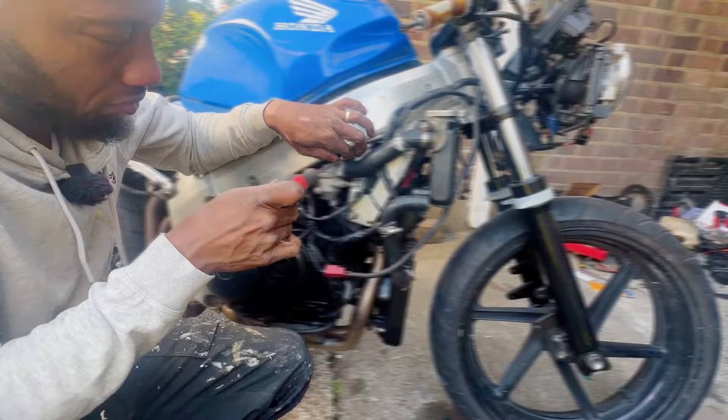I am back on the SV650S, the Suzuki, and today I'm going to attempt to get these carbs synchronized and get this bike running the way it should be. So in the last video we managed to get the carbs cleaned up, got the carbs back on, and we got the bike running, not running how I'd like it to, but running anyway.

So there's a couple of things I need to check first before we can try and get into the sync. There's also something that I've noticed after going through the service manuals that would have been contributing to the rough running. So I'm going to show you guys that now, and then we're going to try and see if we can get this thing synced up.

All right guys, so here is the bike. So it is running. I've had it running for like 2 minutes, but I'm going to have to get it running for probably about 10 minutes or so just to get the engine warmed up to temperature before we do the synchronization. But before we do that, I'm just going to run through a couple of things for anybody who wants to do this, things to look out for to get this thing done right.

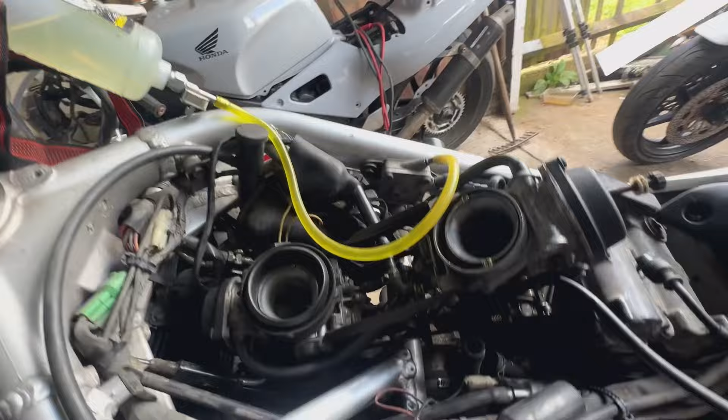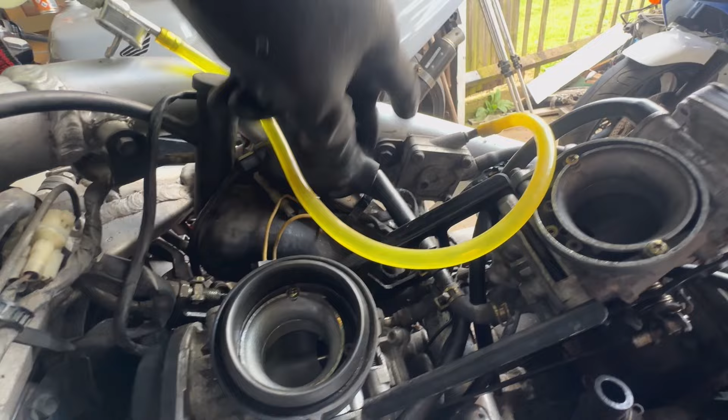So one of the first things I realized when I was going through the service manuals and the connections for the fuel system, obviously I didn't get a tank with this, so I wasn't sure where all the wires go. So we've got a fuel pump on this bike, which is here. We have the fuel fed into the fuel pump, and then it pumps the fuel out on this one here, and that goes down into here and then gets split to that carb on the back and then down to this carb on the front.

Okay, so there's a Y connection here. So into the fuel pump, out of the fuel pump. There's also a diaphragm in here which opens and closes, it's like a diaphragm that opens as a vacuum. Basically a vacuum sucks air out through this hose into the engine here. So this hose basically is the vacuum, I'm trying to get the right word.

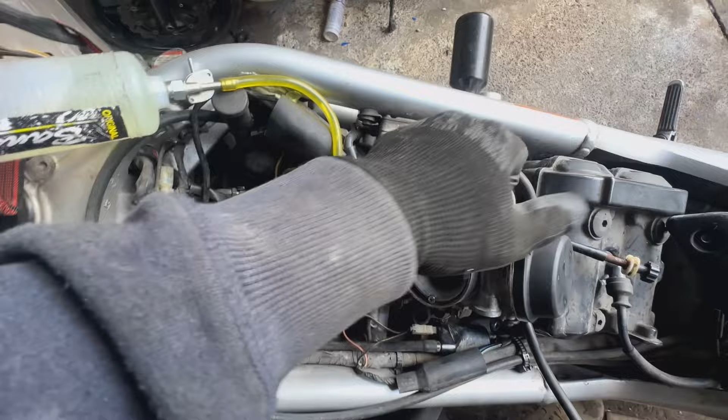Basically there's a vacuum that's created in the engine while the engine's running, and it'll open this diaphragm to let fuel out. So at the moment with the bike off, no fuel will be going down to the carburetors. Okay, so you need to have a negative pressure connected to here. So we can leave this here for our test purposes, so it already has its negative pressure, but the carburetor also has, because this is something that's slightly different than the VFR.

On the VFR, this hose is the way you would put your carburetor sync tool on, but on this bike you actually have a vacuum connection on the carburetor itself, which is this hose. Now this hose provides vacuum to the actual gas tank, which has another diaphragm on it. So as it is at the moment, this being open when I was running the bike would be an issue. I should have blocked this with a screw.

Okay, so this is basically allowing air to be sucked in to the engine through this pipe. So this will cause some sort of issues with the revs hanging and stuff like that. So when we're running it up, I'm going to put a screw on here. But when I'm doing the carburetor syncing, I'm going to pull this pipe off, and I'm going to connect this pipe to my syncing tool or meter, and this will read the vacuum from the rear cylinder.

Now on the front cylinder, with these carburetors, basically if you took this carburetor and flipped it around over here, then obviously this little inlet here would be on that side, and it is there. So we're going to look around the bike on this side. I'm hoping I can get to it. I might have to drop this radiator, but not sure if you guys will be able to see.

Let's see if we can see it from here. Okay, yes, we can see it. So just underneath the throttle cable, you see there's a little black rubber cap right in the center of the screen. That black cap is basically where our hose is going to be. So what we're going to do is pull that cap off, and then we can feed a hose onto that, and that will be where we get a meter reading for the front carb.

So it's simple. It's just two pipes to the sync tool, and we've already got vacuum for our fuel, and that should be basically it. We do need to have it running at idle of about 1300 RPMs according to the manual, so we will make sure that's set at 1300.

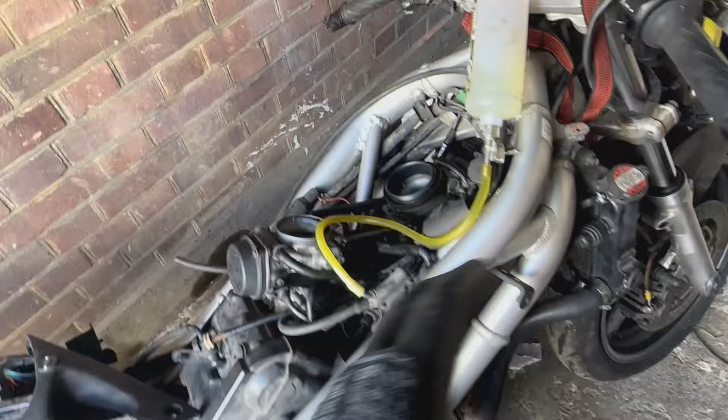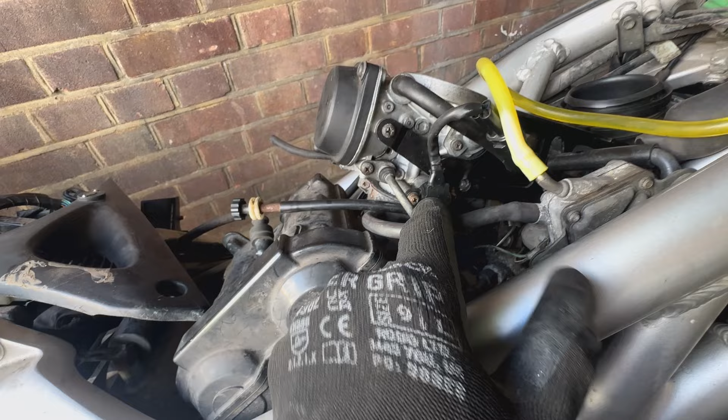Also, before I do it, while I've got it running now, I'm going to adjust the throttle position sensor. So we did play about with it the last time, but I've actually got some data from the service manual that explains how we tune this. So we've got to tune this right before we do the carb sync. So I'm going to show you guys a quick video as I go through the manual, and then we're going to try and implement the technique and see if we can get this thing correct.

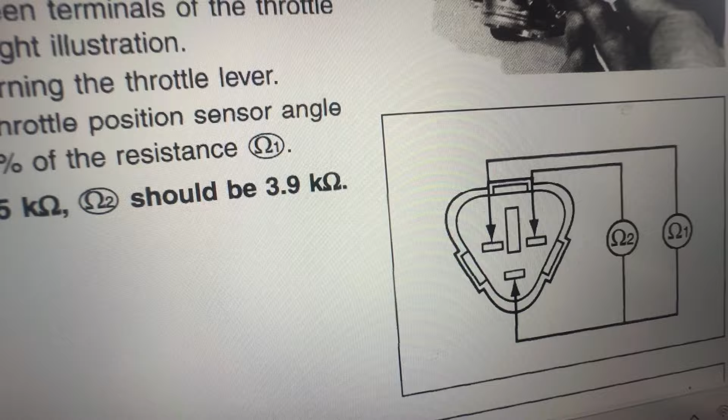So I've got the service manual here, which explains how we set up the throttle position sensor. So I do need a multimeter for this. So we can see the 3 pins here, and we need to do resistance readings. So we've got the resistance ohms 1, which will be between the left pin and the bottom pin, and the ohms reading 2, which is the right pin and the bottom pin.

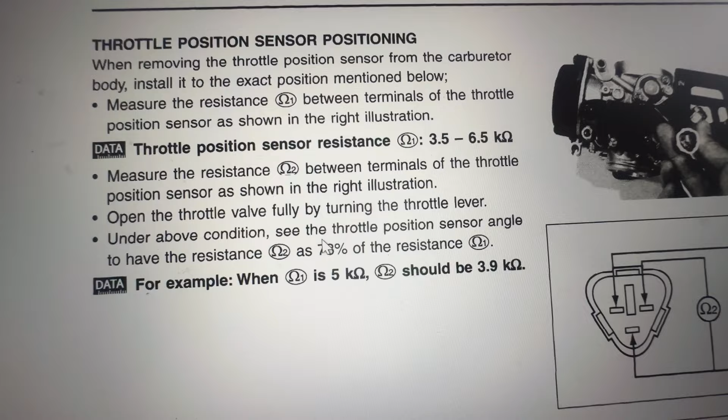So this is the procedure. So it says, when removing the throttle position sensor from the carburetor body, install it in the exact position mentioned below. So obviously we did take it out for the rebuild, so I need to now tune it accordingly. So it says, measure the resistance ohms 1 between the terminals of the throttle position sensor as shown in the right illustration. So the resistance should be somewhere between 3.5 and 6.5 kilo ohms.

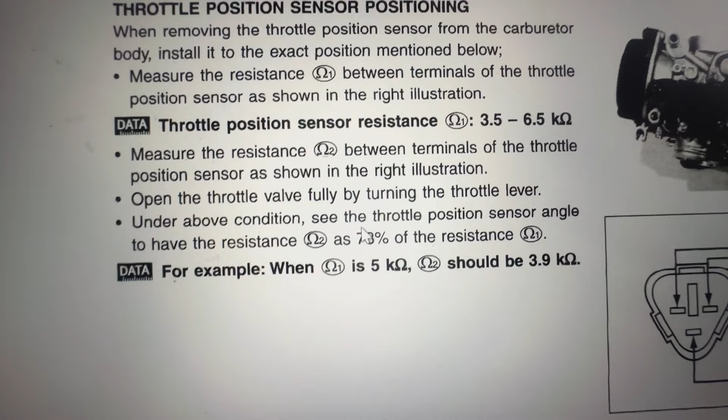And then we do the same measurement again for the ohms 2. And that should be between, but actually it doesn't say what it should be between. What it says is, open the throttle valve fully by turning the throttle lever. Under the above condition, the angle should have a resistance of, let's move this out of the way. So ohms 2 should be 78% of the resistance of ohms 1. So basically there's a ratio between the two readings.

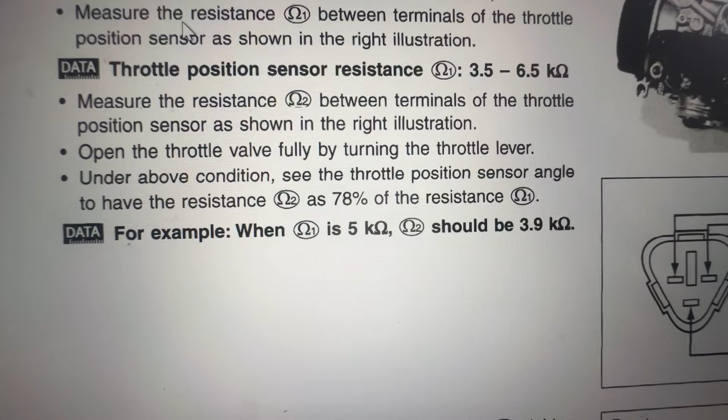So it gives an example. So if ohms 1 is 5 kilo ohms, then ohms 2 should be 3.9. So all I've got to do is whatever I get at ohms 1, I need to times that by 78%, and then that's the figure that I should be trying to adjust it to get to for ohms reading 2. So I hope that makes sense. Kind of makes sense to me, but we're going to put that straight into practice.

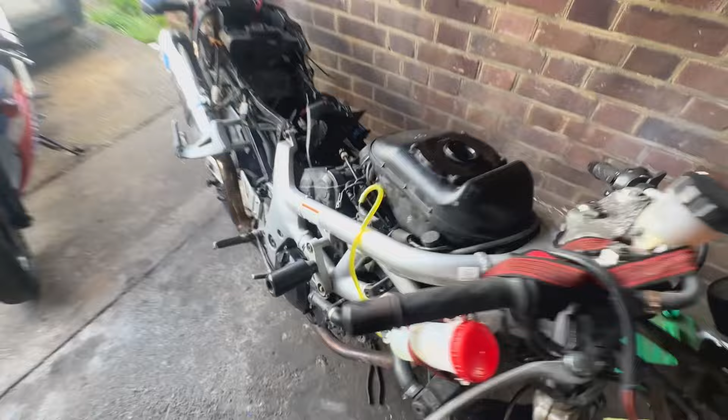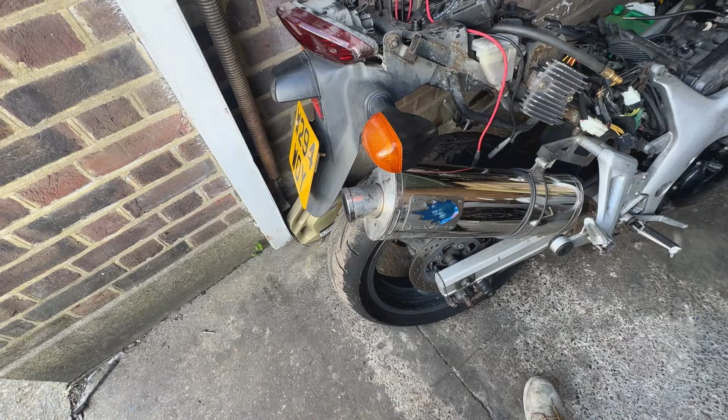So I put the airbox on just so it can run a bit better. We can still hear some popping. So the idle is still a little bit rough. So I've got my multimeter, and we're going to try and adjust this now.

Right guys, so here is the connection. So I've disconnected that connector. You can see the diagram here. So we've got the bottom one, which is pretty much the common, probably the ground or something. And then the far left one will be our resistance reading 1, and the far right will be resistance reading 2. So we'll go between the bottom one and the left one. We need to find the reading there, and then the bottom one and the right one should be 78% of the first reading. So let's have a look.

I've got it into ohms. I set it to 20k ohms. See if you guys can see that. Let's see if we can set that up here. Okay. Right, so we're going to check the first reading, which is our baseline. So that will be the bottom one and the left one. So we got 5.28.

5.28. Now the other one's supposed to be 75 or 78% of that figure. So basically 22% less. So it's probably going to be somewhere like 3 point something. It should be 3.5 maybe, something like that, or 4. So we go bottom and right, and what do we have?

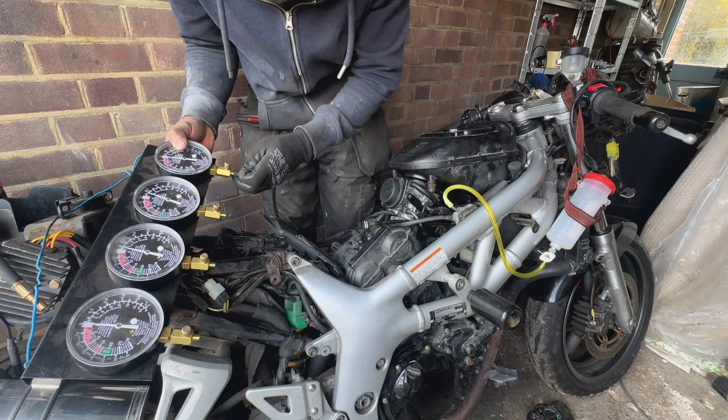Cylinder 1 to the vacuum gauge. You guys can probably see that. Let's see what we get now on the back one.

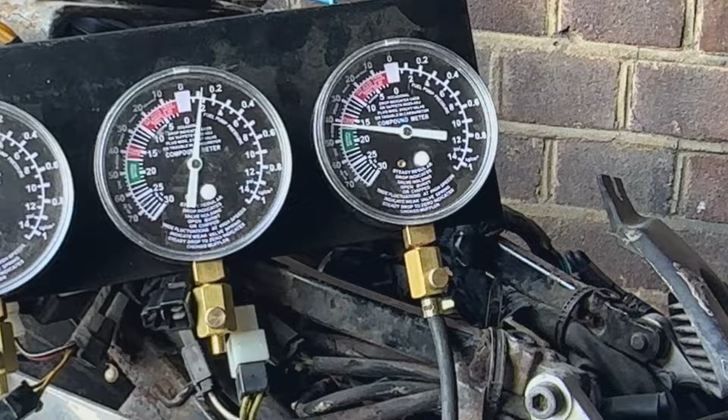What's interesting is as soon as I've connected this vacuum line in and removed the old piece of hose that was in there, throttle response is spot on now. So I'm not sure if that bit of hose had a leak in it. I did put a screw in it. Maybe it was still leaking, or maybe there was actually a leak in that hose, I'm not sure. But for some reason, the throttle response is back.

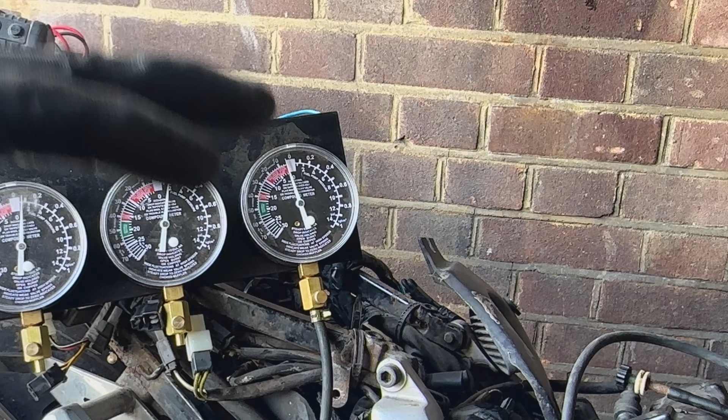I'm going to connect this one to that one, get a reading, and I'm also going to connect it to this one and calibrate them together so that they're both working the same. I'll show you guys what I mean.

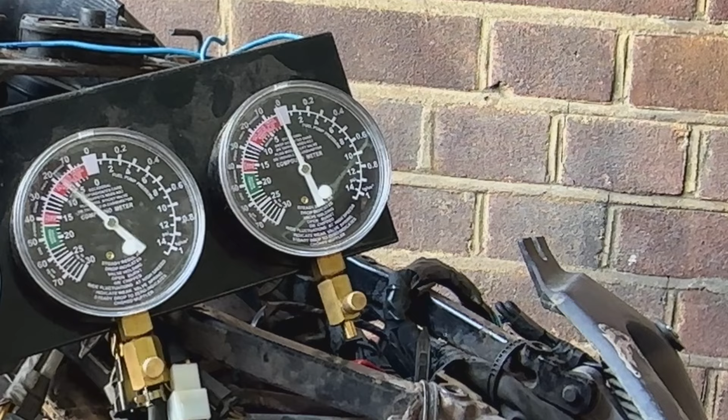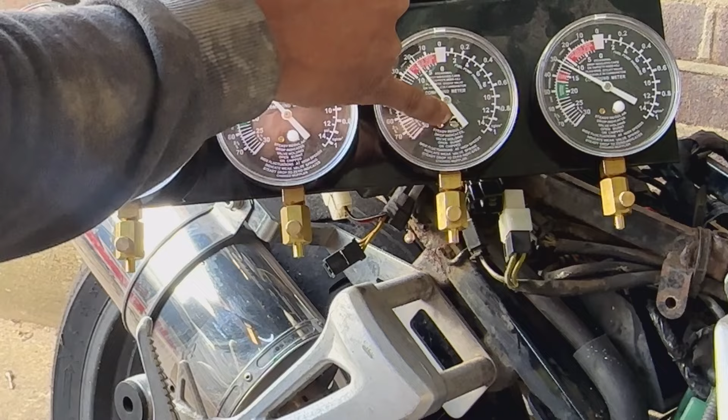Guys, so what I've been trying to do is to try and calibrate these, because when I got them I never actually checked them. You can calibrate them. There's a little hole there and you can get a little flat screwdriver and you can calibrate these, I believe.

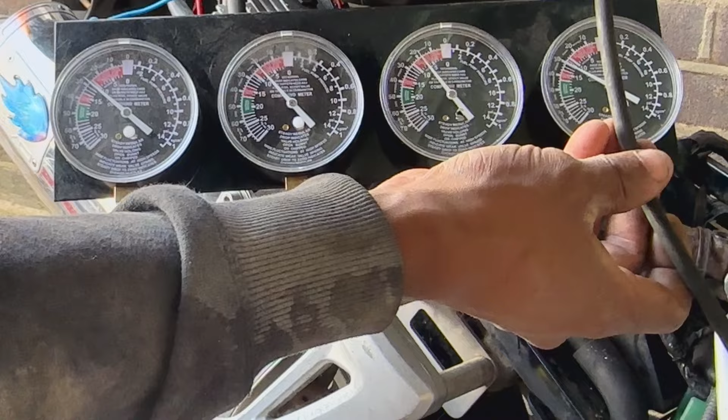So what I've done is I've connected the vacuum to this line, and then I kind of closed it to freeze it at that point. Did the same with that one, gently closed it, froze it, did that one, and because they're all reading the same vacuum or the same cylinder, they all should be reading the same.

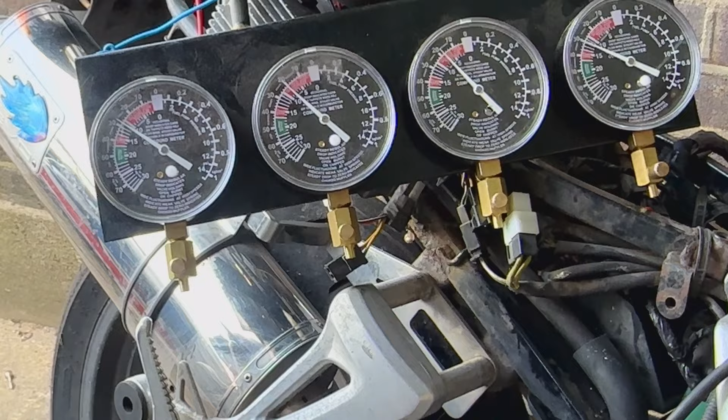But you can see this one here is closer to 27.5, 28. This one's about 20. This one's about, I would say, 19. And this one's like 31. So they're all quite different. So I'm going to see if I can adjust these and calibrate them all to be the same. And that way I'll get a more accurate reading.

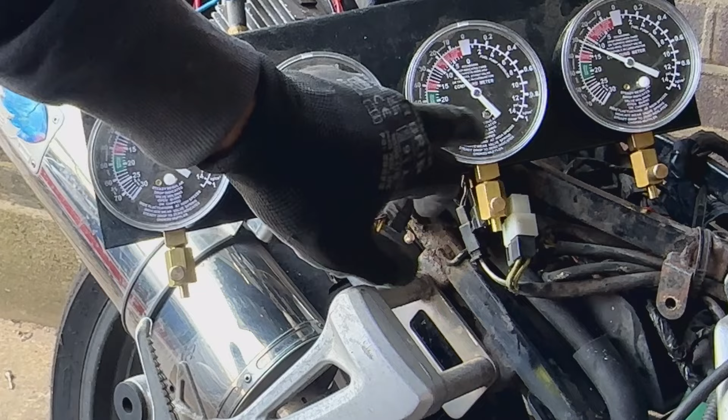Because if you're trying to read two cylinders, but your two meters are not the same, then it's going to throw off all your readings. So let's try and see if we can calibrate these. I think I know how to do it. We'll try and see. All right, so we've got these little plastic caps you can take off.

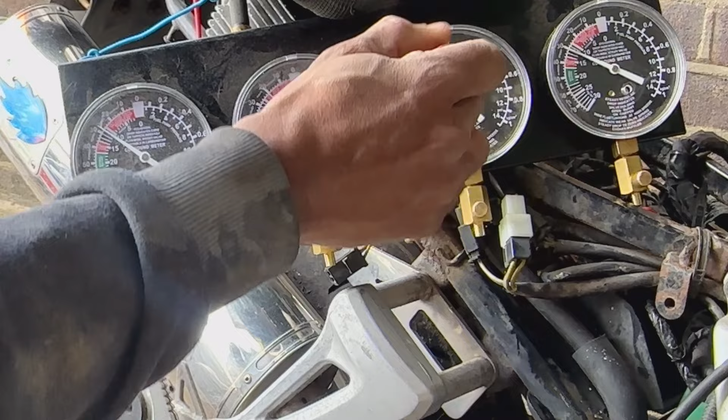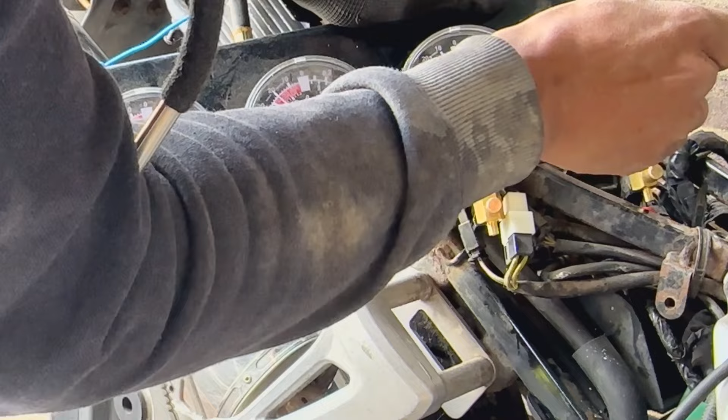I believe that you should be able to just turn this little dial and adjust these. So this one is probably the one that's the most way out. Maybe if we can get them all to around 25. Let's see. I'm not sure if you guys can see that. My arm's probably in the way.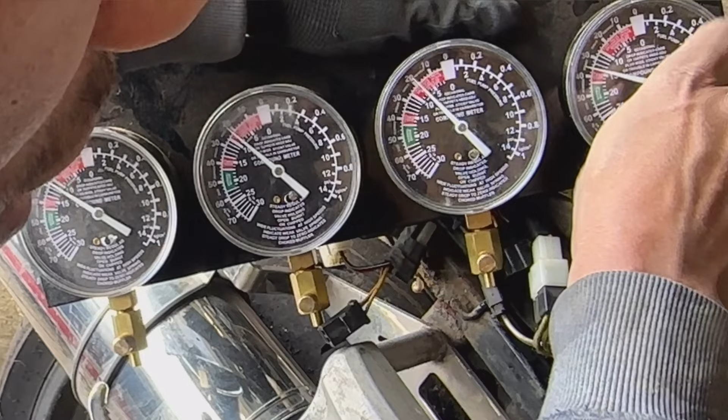So right now we're at 35, so if I turn it clockwise, right, so actually I'm going to bring it on that line of 10, so you got 0, 5, 10, so that's about 10. Let's see if we can get all of them at 10.

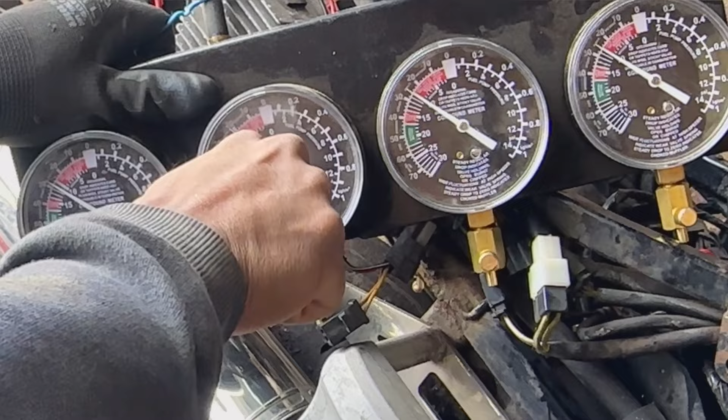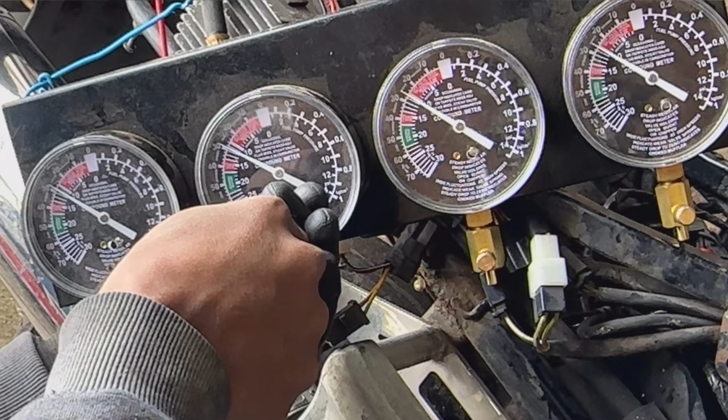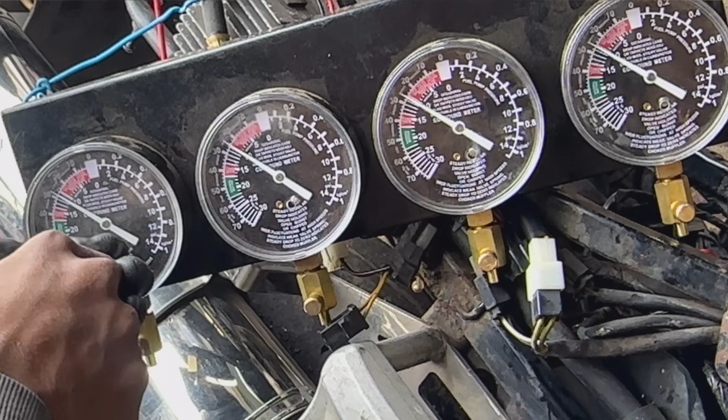This one doesn't want to move. There we go. 10. Okay, so I've set them all at about 10.

So what I'm going to do now is open these again so they go back and reset themselves, and I'm going to connect the vacuum to each one, and then let's see if they all read the same. So let's start with this one.

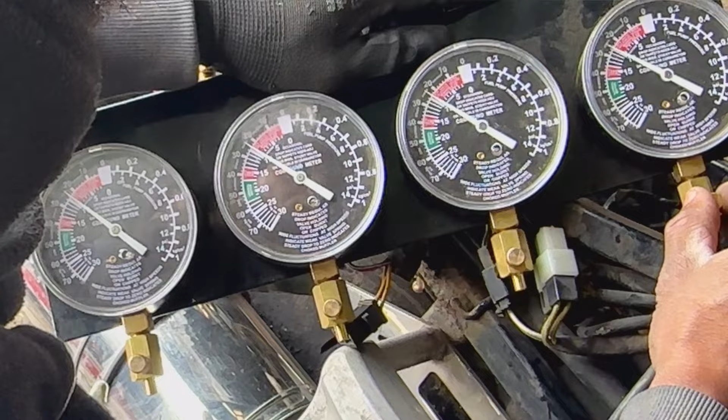Guys, I'm happy with that. I'm very happy with that. So as you can see, I run the vacuum and I slowly close the needle, and the needle's all set at roughly about the 10. So you can see how way out they were from factory.

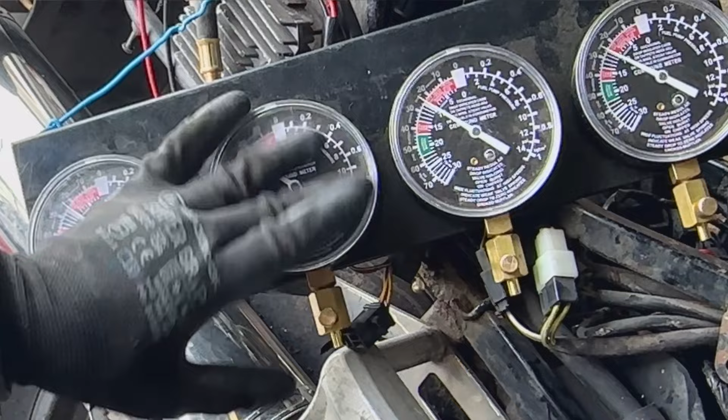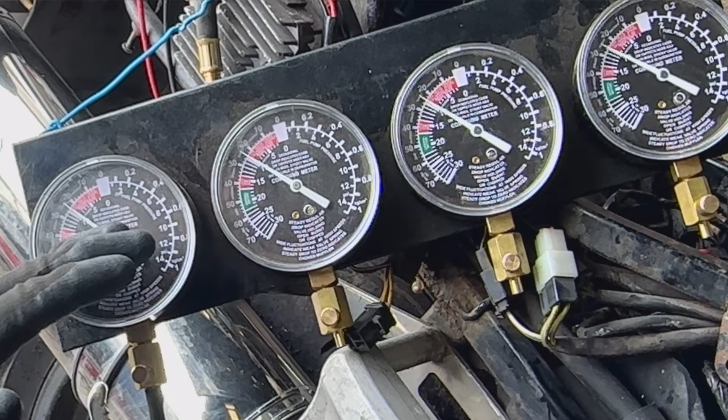So even when I was trying to use these the last time on the VFR, I needed to calibrate these when they came out of the box. So maybe that's a tip. Anybody who buys these sort of, I got these on Amazon, they're not the most expensive. Definitely do this procedure before you use them, because some of them were miles out and you're never going to be able to get a correct reading like that. So that's just, I guess, a little tip there for somebody.

Right, so I'm going to connect up the front one. So I will leave the back one on this one, I'll connect the front one on this one, and then we've got to try and sync these two together. Okay, got that. So got that little cap off, little rubber cap. You need to make sure you put that back on. All right, so all you need to do really is just loosen this radiator enough to get past it.

There we go. Right, got vacuum hose in. Gotta make sure we don't kink it. And still on the reach. Okay. So right guys, we are ready. We're all set up. So we've got line 1, line 2. So this is the rear cylinder, that's the front cylinder.

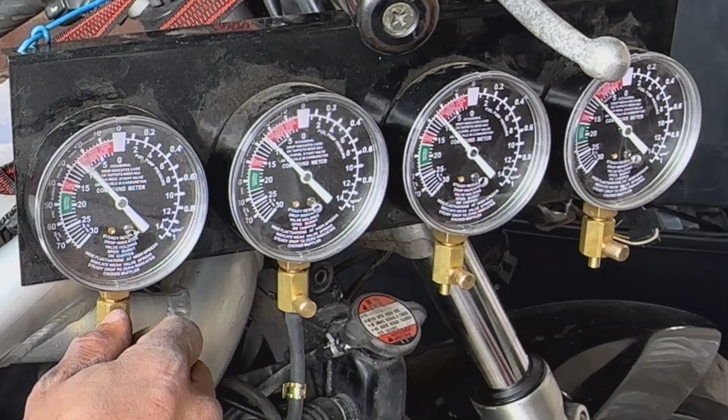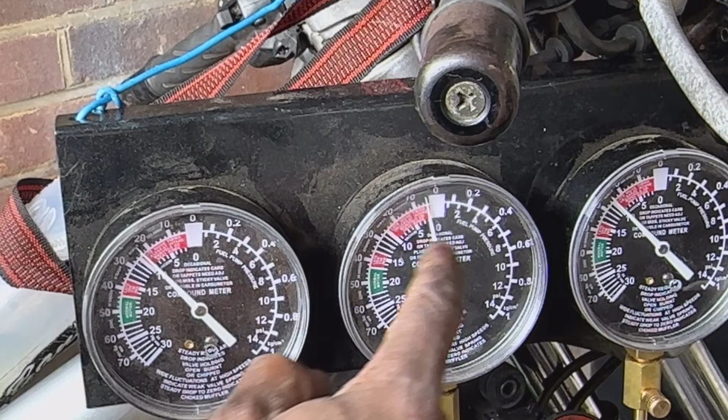I need to take the airbox off to do this. So I'm gonna do that now. And the sync screw is actually on the other side, so you guys won't be able to see it. It's one single screw that you basically need to just turn to adjust it. So I'm going to be sort of trying to see it from one side, but let's see what we can do. Start up. Way out. This one's way up here, this one's way down there.

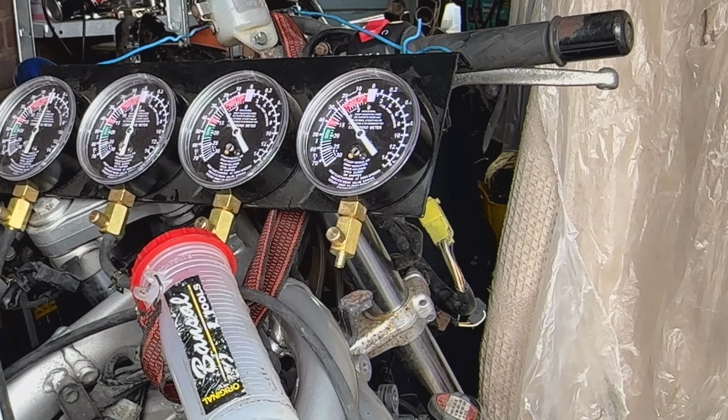Seem to have adjusted and synced them, but it seems like it's revving high, so I think we've got a vacuum leak somewhere.

So guys, let me just give you an update what's happening here. So I did lose some footage here, so I'm just going to explain. So after I got those carbs, it seemed that they were synced nicely. All of a sudden, as soon as it got synced, I was getting 7,000 RPMs at idle. I would back the idle screw all the way out, no throttle, and I just couldn't get it to come down from 7,000 RPMs. So to me, it seemed like I have a massive leak somewhere or it's overfueling.

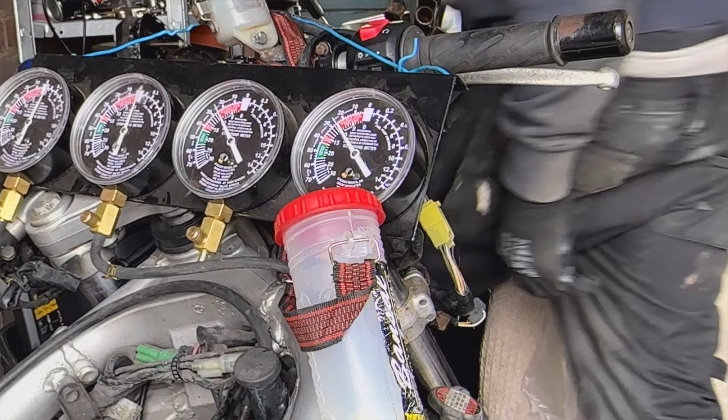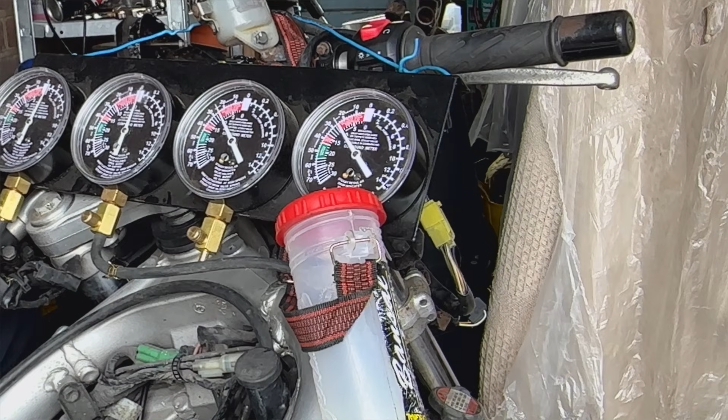So I said I was going to look at the choke circuit. I pulled out the rear choke, which is easy to get to, and there's a rubber O-ring around that sort of seals it, and that sort of just broke in half in my hand. So it seemed like that washer wasn't really sealing very well. And as soon as it broke, I remembered that I had a similar looking one, which was in the bits of carburetor parts when I was building the carbs.

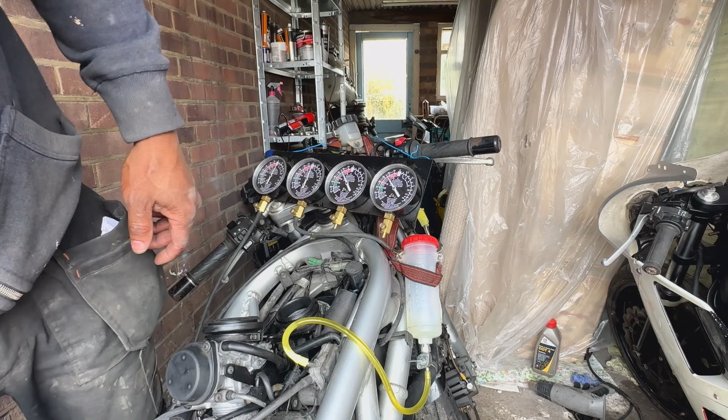So I started to think that maybe the other broken one that I found was for the front carb choke, because it looked exactly the same. So what I did is I replaced the rear one with a new O-ring, and then I'm about to take off the front choke to check to see if it's missing that O-ring. As usual, guys, nothing is ever straightforward. I can't get to the back ones from below because the frame's in the way, so I've got to take the carbs out.

So I'm just moving this throttle cable out of the way. Okay, I should be able to get to it now. Yeah. Yep, as I thought, totally missing the washer. So that was the washer, the broken washer that I found in that box. So we've got a new washer to put on here. Okie dokie, so got that back on now.

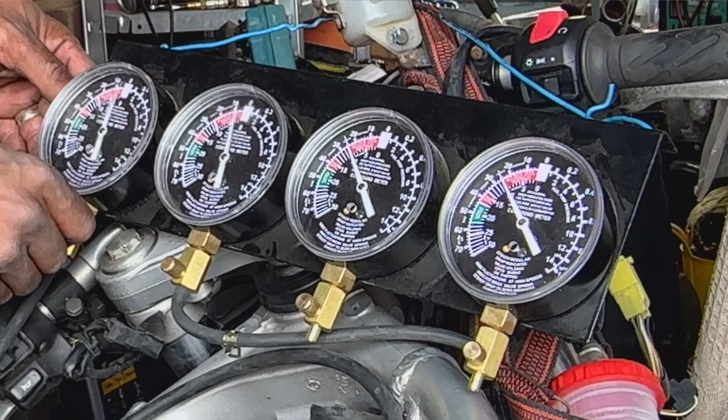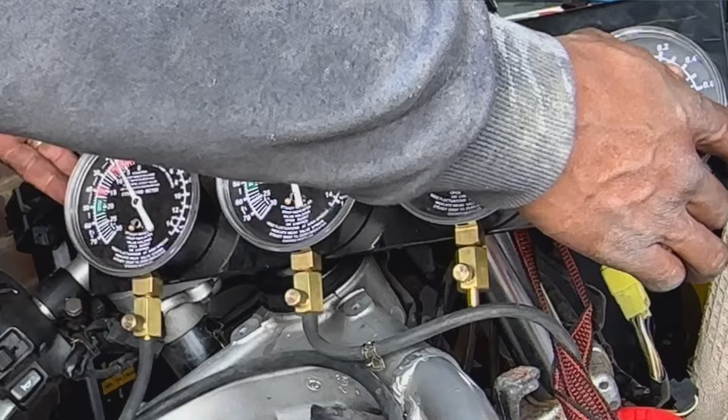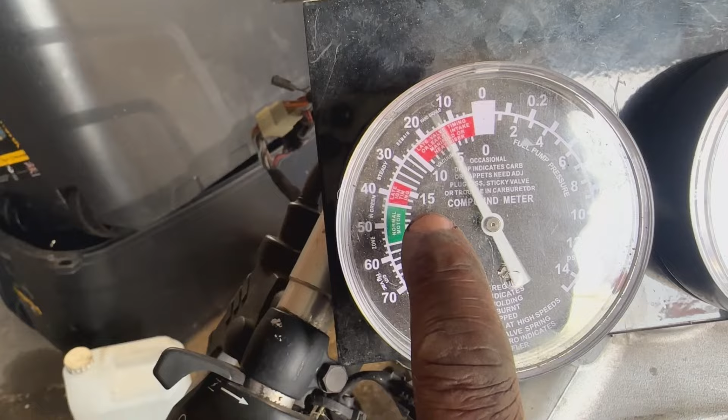Choke on now. Guys, we're sorted. All it was was a rubber O-ring. So basically it was almost working like the choke was on all the time. Or maybe it was just allowing air to escape or to leak into the carb. So simple washer, which was missing on that one, and broken on the other one, so 2 new washers in there. So now we should be able to sync these carbs, which I think are already synced, but let's have a go. What you need to adjust.

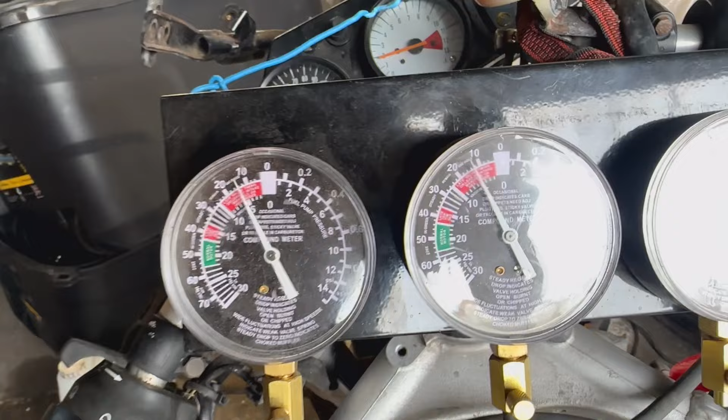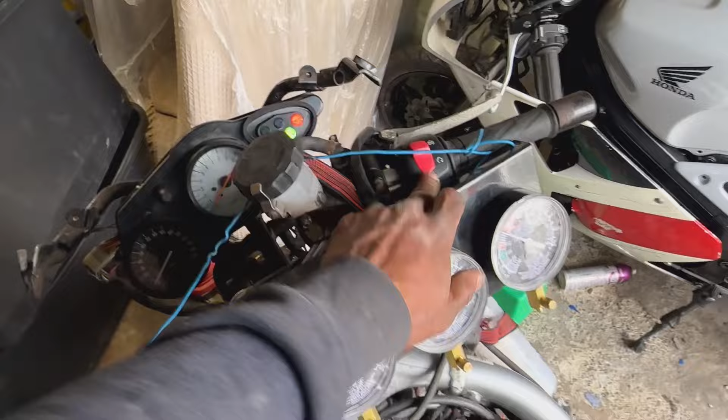So that looks spot on to me. So let's start it up again. And what I'm going to do this time, I'm going to close the valves so that we can turn off and see where they stop.

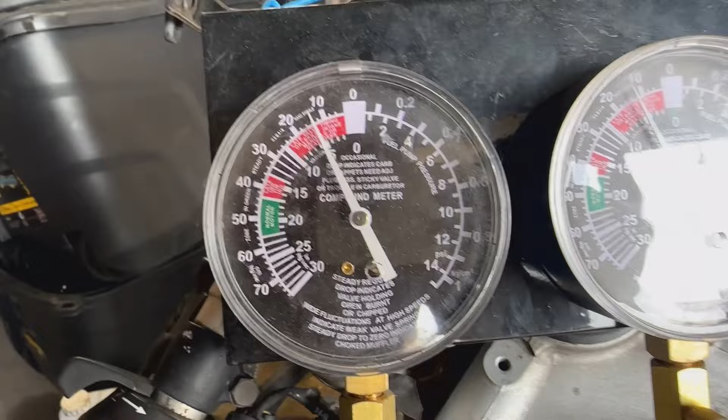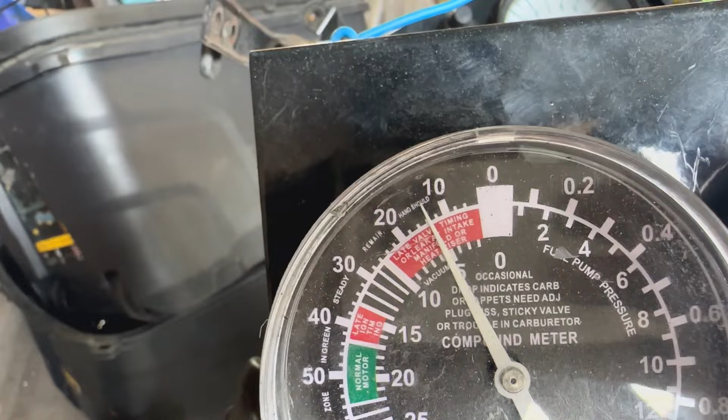So I've closed those valves just to get sort of like a snapshot of where they are. So we can see this one here is about, if you look at the top meter, somewhere around 10. I think each of those are 14. And then if you look at the next one here, we're about 10 as well. So I think, guys, we have got the carbs synced up.

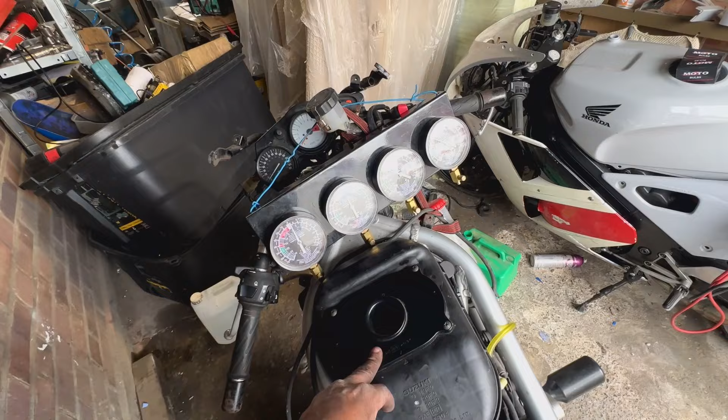So all right, guys, I'm going to put the airbox on because it needs the airbox really to run the right way. So I'm going to put the airbox on, and then we're going to run it up and then just check that these are all working well. So I've put the airbox on now, and I'm ready to start it up, and let's test it out.

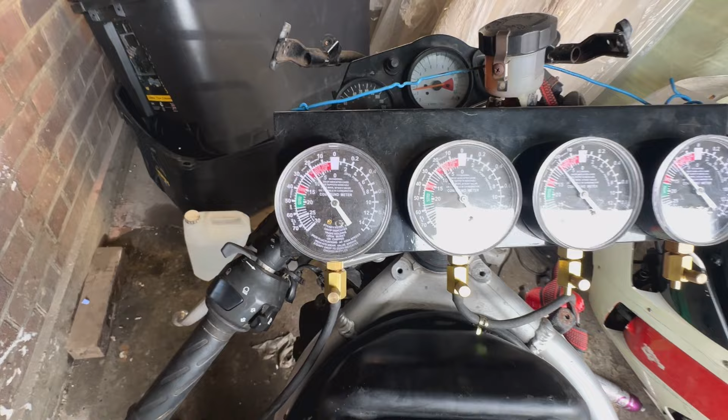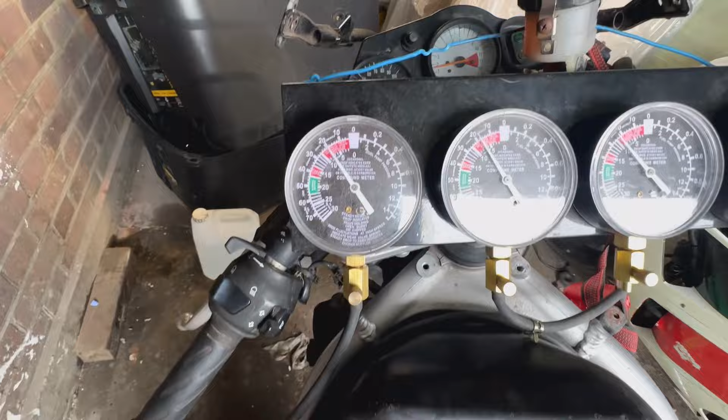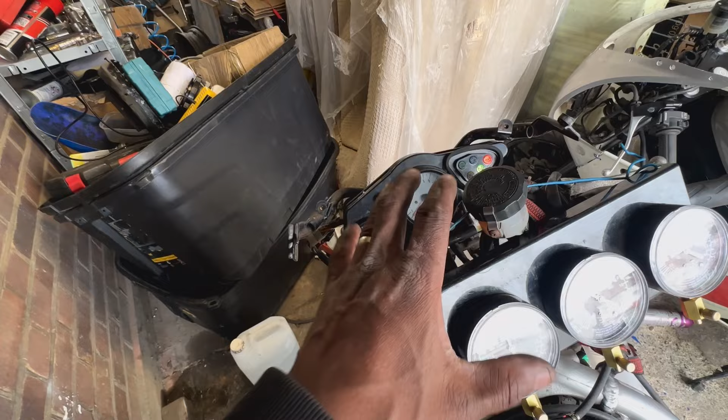Guys, as you can see, our carbs are nicely tuned up. The revs are staying nice and steady. Throttle response is there. The revs are not hanging anymore. It sounds good. No more popping and banging. It feels really smooth on the throttle. Really happy how this is running. Big success with the synchronizing.

And good thing that we found that we had another issue, which was the choke. So again, that might help somebody out there who's playing about with something like this. So before I strip this bike down, because I'm going to do a full strip down on this bike and a full restoration, I just wanted to make sure the bike is mechanically sound, the engine and everything. So far so good. Happy with the engine. Gearbox is the next thing.

So I'm going to put the rear set on, the foot lever, gear change, which wasn't on the bike. I don't know why it wasn't on the bike, but I'm going to put it on, make sure that all our gears are good. So I'm going to see if I can somehow put a seat on this thing and maybe just take it up my little quiet road and see if I can go through the gears and make sure everything's good. If everything's good with the gears, then this bike is ready to strip down.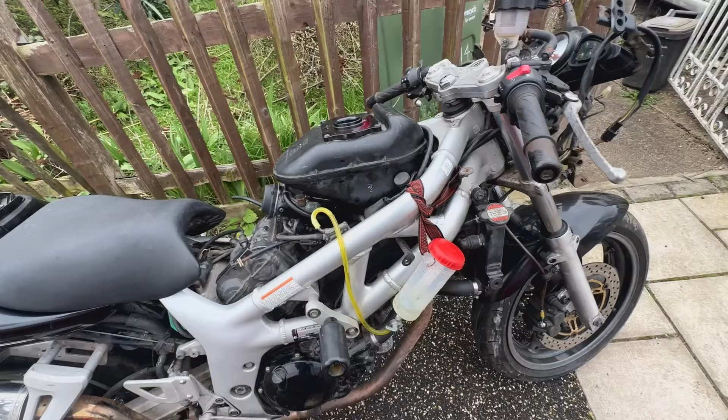There we are. So what I've done is I've just put the bike back together to an extent. Just screwed the clocks on. Here you can see my petrol tank, which is here. Put the seat back on as well. So yeah, I'm just gonna literally test it, the top of the hill and back down, and just make sure all the gears are changing, and then if I'm happy with it, it's time to strip this thing down.

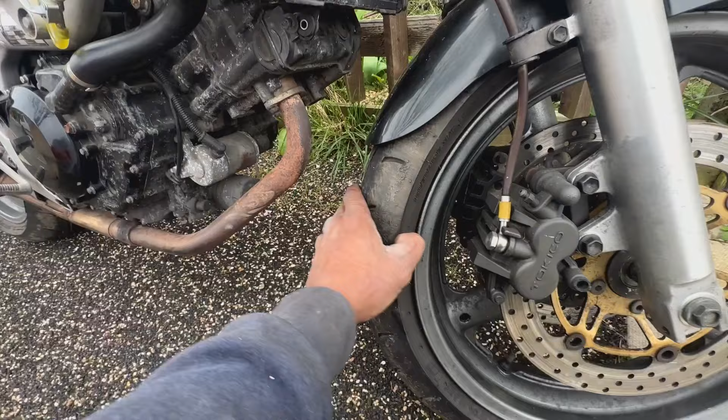Guys, that is it. Our SV650 is running. Guys, this thing pulls like crazy. Really sweet ride. Only thing is that steering seemed very heavy, so I'm not sure. I feel like the tires are kind of flat. Oh yeah, look how flat these tires are. That's why. So yeah, otherwise this thing is pulling really good, going through all the gears, no problem. So I'm very happy. So now guys, we are safe to strip this thing down and rebuild it.

Result today, we managed to sync the carbs, get this bike running nicely. It still does pop and bang, but I've been doing some research and it seems that this bike is just known for that. It sounds awesome though, so I'm not particularly complaining. It's revving properly, it's smooth, no hanging, power is there. It really has a lot of power. Actually, I was really surprised. I think this is like 70 bhp, but it pulls really nice.